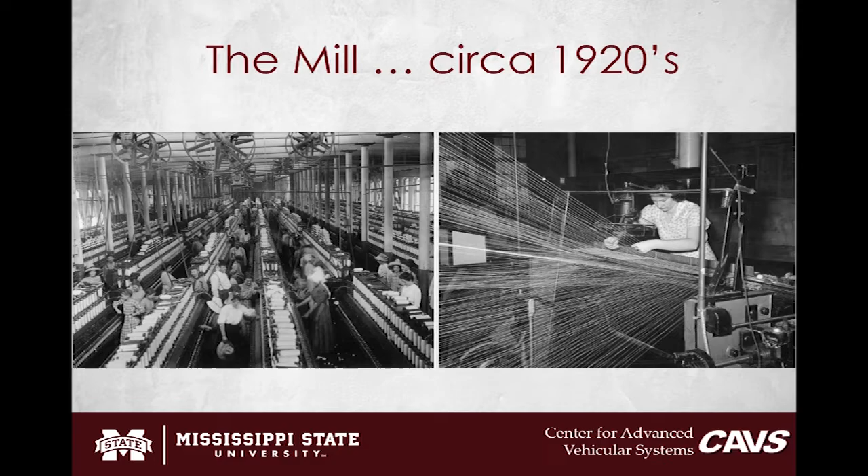About the same time, this building started in 1900, and this is pictures of 1920. About the same time in Japan, the founder of Toyoda dealt with automated looms and dealing with much of the same challenges that happen here in this building. So it's very fascinating—the first automatic loom by Mr. Toyoda is pictured here, and he developed it about 1924.

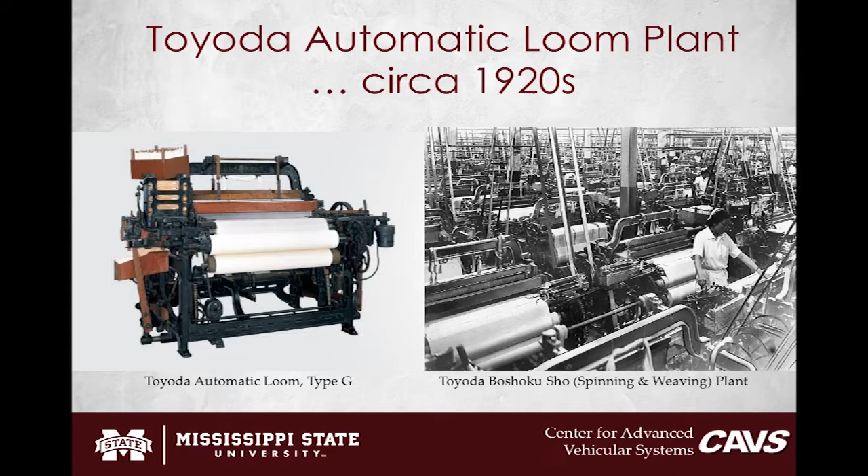It was the first illustration of automation with a human touch. In fact, in the Toyota production system, it's called Jidoka. Now, I will not embarrass myself for all of our Japanese people here, but it's very important—meaning ultimately this involves two different phrases. One is automatic, and the other is autonomous.

The achieving of Jidoka has to do with a topic called autonomation, which is the characteristic that the machine has—autonomation. It doesn't mean stopping automation. It means this combining of automatic and autonomy together.

One of the wonderful aspects that was revolutionary for this loom in 1924 was that it could self-regulate, and it could see where there's a problem in the looming operation, and it would stop immediately when there's a problem that has to be fixed.

And ultimately, what they're allowed to do is free up a person from operating a machine to a person managing machines. It relieves the worker of the need to continuously judge whether the operation is normal or whether an abnormality exists that we need to pay attention to.

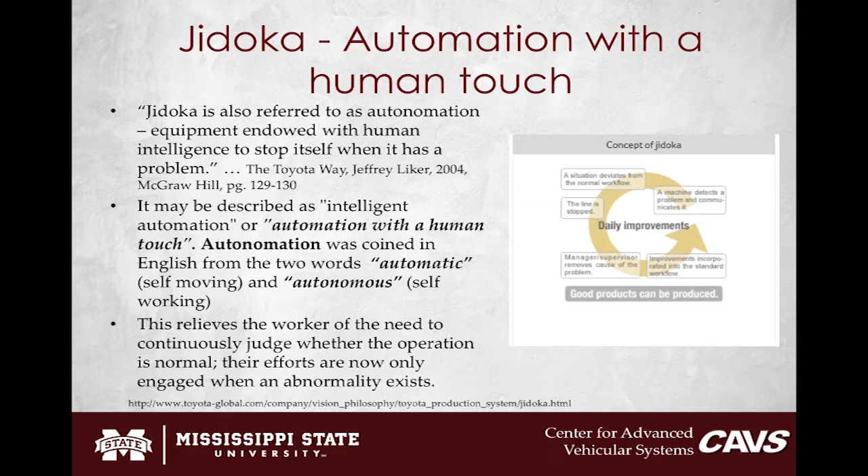And so this is the concept of Jidoka that has revolutionized a lot of manufacturing. And I think there's actually a connection here to autonomous driving.

When we think about autonomous driving, we've already talked about there's various levels of autonomy, from level 0 to level 5. Level 5 is full self-driving under all conditions. Just a step below that is self-driving under certain conditions. Step 3 is limited self-driving, but with some times where the operator takes control. And you kind of back it off to occasional self-driving, to driver assistance, to no automation.

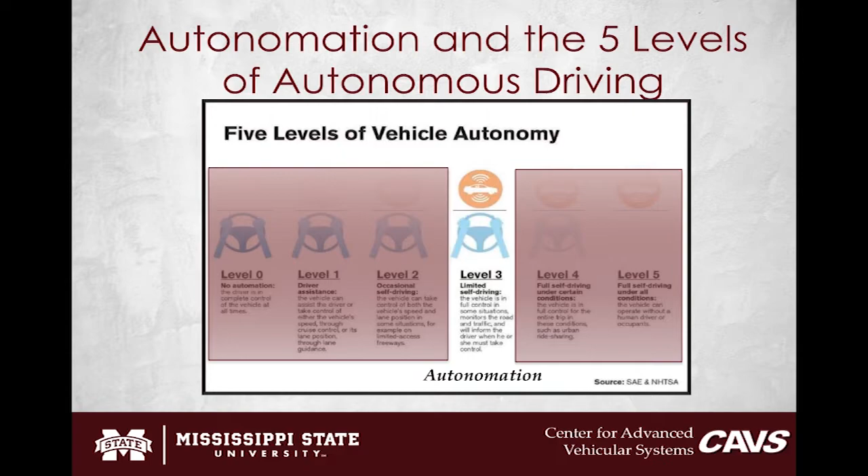So with these 5 levels of vehicle autonomy, it really looks like level 3 is where, if you think of the loom as being the machine, the vehicle being the machine, it feels like in 1924 Mr. Toyoda really discovered this principle of an intelligent machine and how it would impact the human. This is that notion of autonomation, maybe about level 2 or level 3 in this hierarchy of autonomous driving. So he was working this problem at the same time that this building was under production, and I'm sure they were dealing with many of the same challenges that he actually solved.

2017, last summer, my first and really only experience in autonomous driving was at this location in Strasbourg. The event was an international smart transportation conference in Europe, and it was the first day they advertised that someone would ride in an autonomous vehicle across national borders. I don't know if it really was the first, but that's what I was told. I wasn't on the first ride, but I was there on the first day. This is the car, developed with Vedicom, a French public-private partnership. I was very excited. I was in the back seat of that car, and we went from Strasbourg, France to Kehl, Germany and back again.

We did a legal U-turn after we crossed the Rhine River. That was my first experience. It was very interesting. In fact, I have a short little video - that's me in the back seat trying to take a picture of the autonomous car while we were merging into traffic. It was very thrilling, and there were some lessons learned from this event.

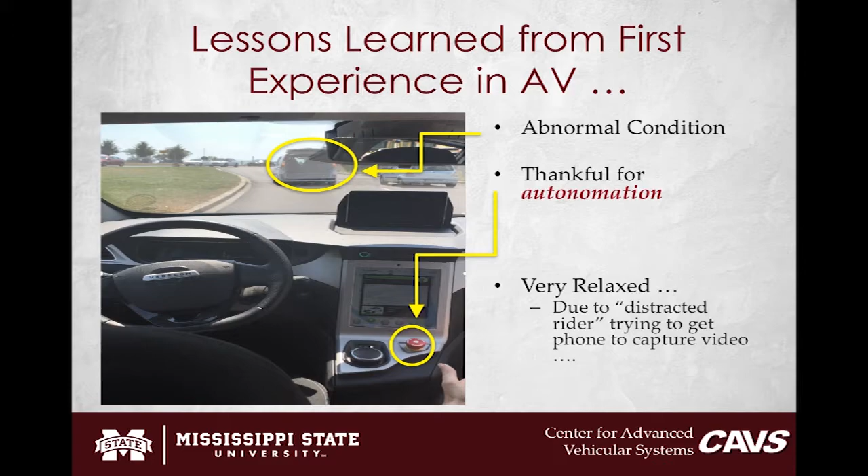It was a great experience, my first experience there. Just very quickly, from a standpoint of manufacturing, which is a much more controlled environment than driving - we have seen tremendous improvements in automation, collaborative robots, and human-machine interfaces in manufacturing. But I can say from 30 to 40 years of intense work in manufacturing, this level 5 automation is very, very difficult. Level 5 autonomy is very difficult to achieve, even in a highly controlled environment.

In fact, I believe McKinsey just did a report on manufacturing tasks, looking at how many of them could be automated over the next several years. I believe it was by around 2035, somewhere between 25 and 60% of manufacturing tasks could be automated - again, the error bar was very high. We don't know where technology is going. But it's a very challenging task, as mentioned earlier.

And the other thing for manufacturing - you get a lot of quick wins early, but it's the last 10 or 20% of automation that's really, really hard. Perhaps we'll see that in the vehicle space as well. And from a manufacturing standpoint, we should always look at the machine serving the person, not the person serving the machine. That actually gets to the heart of our conference - when the equipment serves humans' needs, then it has a lot of value for us.

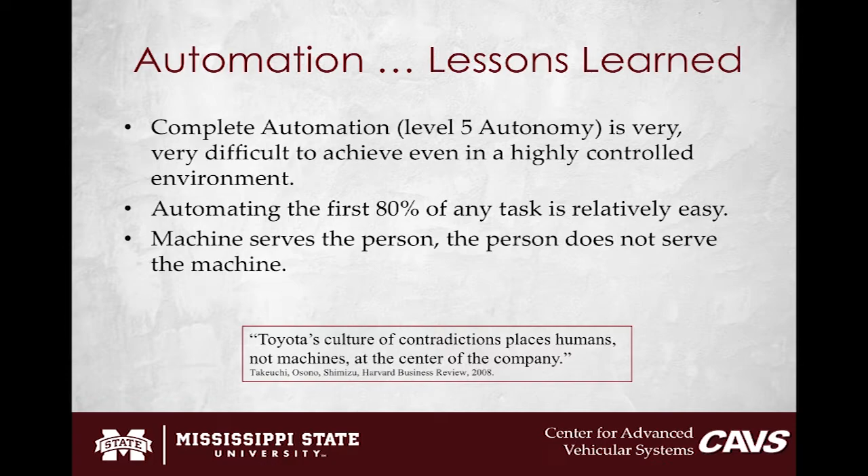In fact, there's a nice comment about Toyota: Toyota's culture places humans and not machines at the center of the company. So I believe that this notion of automation with a human touch is very important to us.

So I wanted to briefly talk about some of the activities and investments we have going on at the university and at CAVS, and I have our team here to help us do that.

We have a couple of selected projects. One is a pedestrian-vehicle interaction using virtual reality. We also have a Halo car project, which is an autonomous vehicle we're developing with our researchers and students to be a test vehicle for us. And then we have a test track we are in the middle of developing, and what we call the MAVS system, Mississippi State University's autonomous vehicle simulation world.

Then we just recently completed an industrial material handling autonomous project that we're very proud of, and the team executed it very well. But because of confidentiality, we can't talk about it much. It's an autonomous vehicle within an airport environment, in a material handling environment that had different kinds of loads, and it had particular interesting challenges.

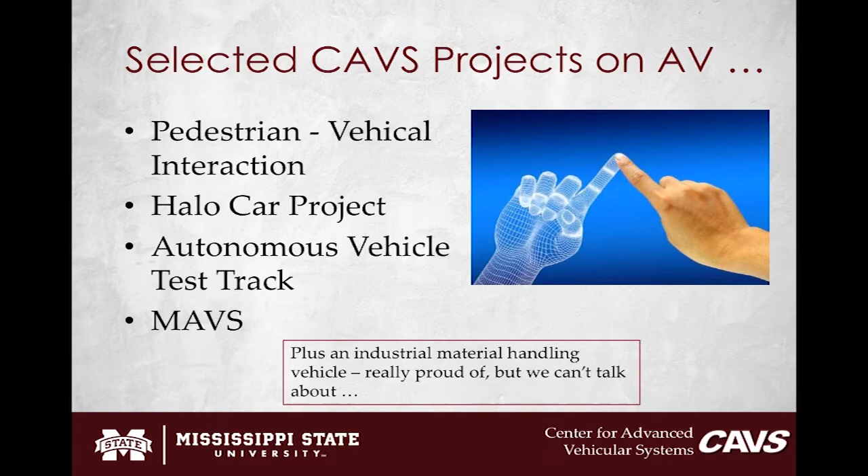So with that, I'm going to turn over the conversation to Dr. Carruth, and he will talk to us about the pedestrian-vehicle interaction project.

All right, thanks, Clay. So we have a slide here on some work we've been doing for the last couple of years, and in fact some of this was initiated as part of our relationship with Nihon University and has grown since then. On screen you can see an image of us using HTC Vive and Oculus Rift technology to put people inside of our simulation environments.

What we're looking at in this image is one of our students walking across, and we have the autonomous vehicle attempting to communicate to the pedestrian that it is safe to cross.

When we look at autonomous vehicles interacting with pedestrians, bicyclists, and other vulnerable road users, there's a discourse that happens between a human driver and those pedestrians. Part of it is that we just know what each other is most likely to do. We assume a driver doesn't want to run over us when we're a pedestrian, and drivers assume the pedestrian will generally follow the rules of the road. But we're always aware that there's a possibility someone's going to come out into traffic.

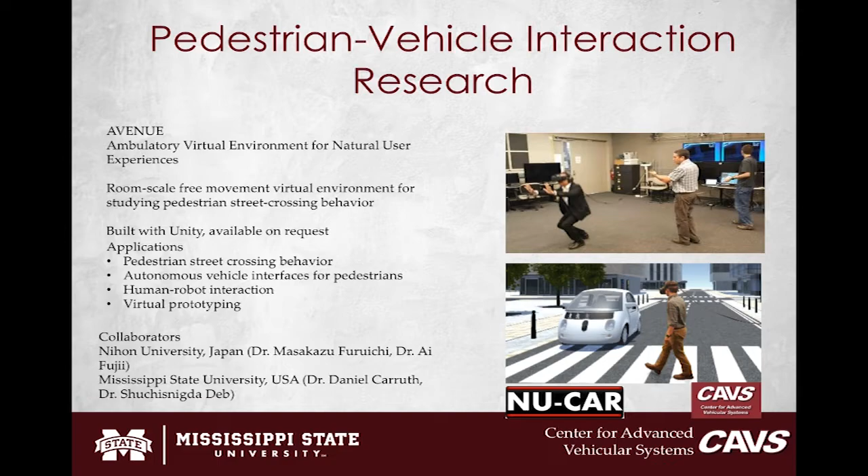We use the VR environment to do that kind of research because it's impractical to do in the real world for several reasons. One is safety—it's a lot safer to have someone walk across the street inside our simulation. Two, I can run a lot more conditions inside the simulation than in the real world. We can test literally hundreds of different methods of communication inside VR in the same time and cost it would take to test just 2 or 3 in the real world.

Also in terms of time, when we go out to do real world data collections of pedestrians crossing the street with vehicles, the logistics are astonishing. Trying to schedule and take over a road to look at that is very difficult. Inside our VR environment, we were able to collect 60 interactions between an individual and an autonomous vehicle in under an hour. By using simulation with a person in the loop, we get a lot more data on how people interact with those systems than we can in the real world.

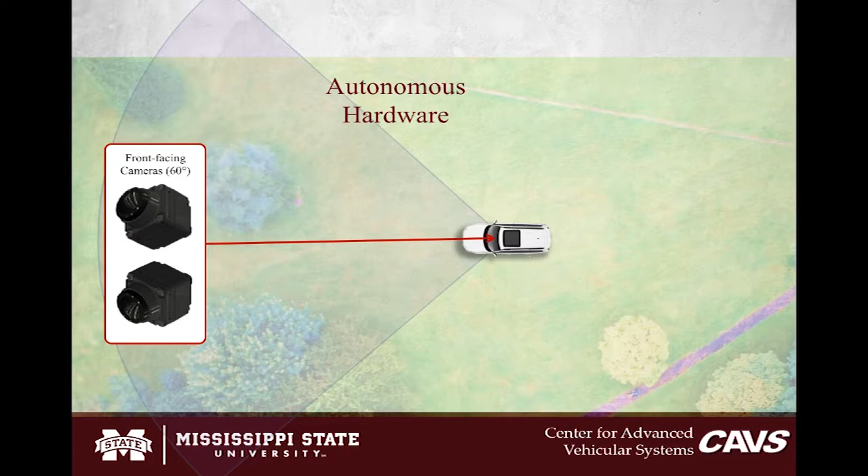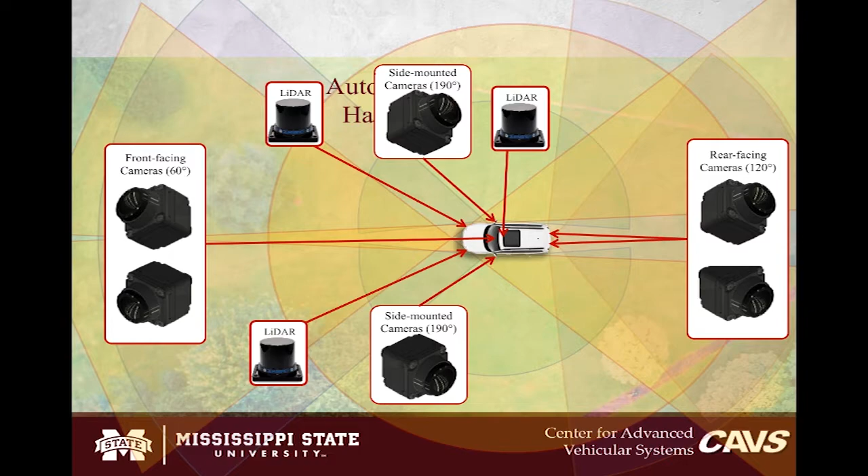Some of the sensors on the vehicle include 6 cameras—front, rear, and side—and 3 LiDARs, which together give us full environmental awareness of the vehicle. We'll add radar at some point, but that's not on the vehicle currently. We're doing some interesting things with how we mount sensors to, as we fuse the data, get a more focused and accurate view of the world in the areas of the vehicle we're most interested in, particularly right in front. This is where we're also using the NVIDIA Drive PX2 GPU supercomputer.

As we fuse all this data together, it becomes really interesting because Sanford showed an image of a free space map. It was on a mostly flat road, and there was a purple area in the middle—that's the free space that's safe to drive. That's a common algorithm. But what if the space in front of the vehicle is not flat, not planar at all? What if it's bumpy, hilly, or angled?

What if instead of doing neural net object classification for cars, pedestrians, and motorcycles, it's trees, logs, and deer? Now the deer one has actually been addressed somewhat in industry, but recognizing trees and logs and rocks in general has been less focused on than on-road object detection and classification. So that is where we feel we can really make an impact in the autonomous vehicle industry.

We're collecting data in off-road environments. We've already taken this vehicle platform out and collected some data. Clay is going to talk to you in a minute about a really neat facility that we're developing in order to help collect that data. And we take that data and we fuse it together, and we're working on really novel ways to process it.

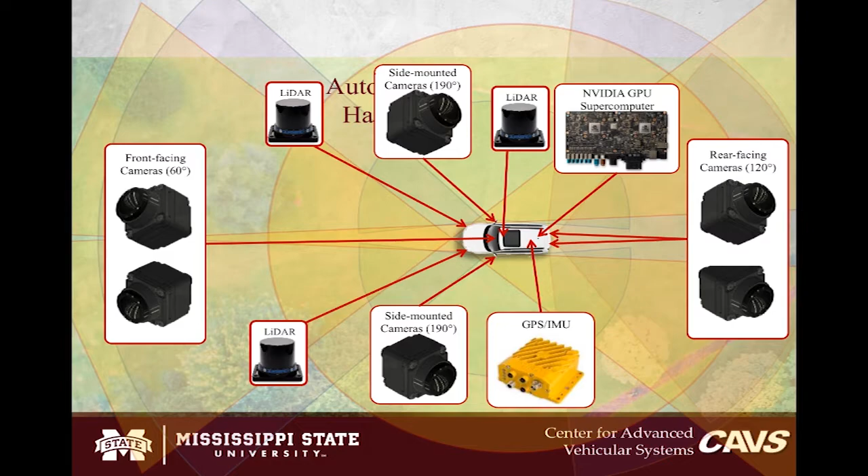We look at the world model, which we then use to control the vehicle's actions. For instance, we're working on what we call a characterized occupancy grid. So we'll take all the data from all the sensors, fuse it together, put together everything we know about the environment, and say if this room is our environment, create a 3-dimensional grid around the entire room.

And in each grid we say, inside this cell, what is inside the cell? Is it unoccupied? Is it occupied? If it's occupied, what do we know about what's in it? What are the characteristics of that cell? What's its tangency or adjacency to the cell next to it? Is it a step or is it a smooth curve? That represents something we can drive over. So we have to classify not just obstacles, but objects, and objects can be either traversable or non-traversable.

So these are all the many kind of unique challenges that you start to get into when you're in a completely unstructured environment, such as an off-road environment. So we're really excited about this.

Briefly, I mentioned the vehicle is all electric. We have a 90 kilowatt-hour battery pack, which is good for about 230 miles of range. Just to put this in perspective, the longest range Tesla vehicle has a 100 kilowatt-hour battery pack, so we're on par with that in terms of range.

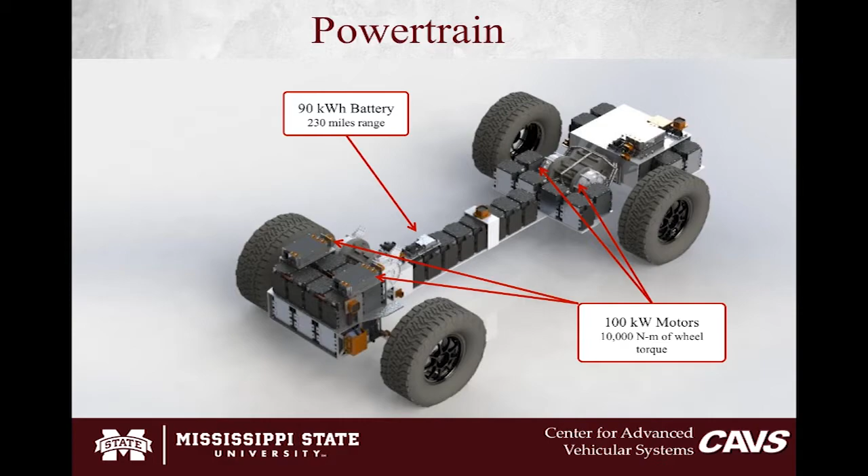The vehicle is driven entirely by electric motors. It has one for each wheel. Altogether, it makes about 10,000 Newton meters of wheel torque. To put that in perspective, each motor has about the same wheel torque as a Mustang GT, and we have one on each wheel. So the powertrain of the vehicle will be very high performance.

And MSU isn't doing this alone. We have 6 industry partners that have come on board and provided either cash, in-kind donations, and/or engineering support. So we've built almost a consortium of industry partners that are helping us achieve this, NVIDIA being one, and also 5 other partners. So this vehicle is back in our shop right now, in our lab, being put together with quite a large team of researchers working on it. So we're really excited about this project.

One of the things we want to talk about is that we have just acquired 50 acres close to our building. If you look at this aerial shot on the right-hand side, the CAVS building is on the far side, then our high-performance computing collaboratory is over there, and then we have 50 acres behind. We are converting this to an autonomous vehicle test track with a large focus around off-road. You'll see we're going to have different artifacts - sand, wooded trails, hilly terrain. We'll also have a concrete pad.

So this is the vision that we have. Right now we've acquired the 50 acres, so we have a 50-acre wood. The first phase will be looking at the off-road situation. We have some sponsored research with the Army and other people who are interested in that, but we want to go beyond that and look at other aspects. It could be - Professor Snyder and I talked about precision agriculture and autonomous vehicles in the agricultural environment - so there could be some nice collaboration opportunities. We look forward to discussing that.

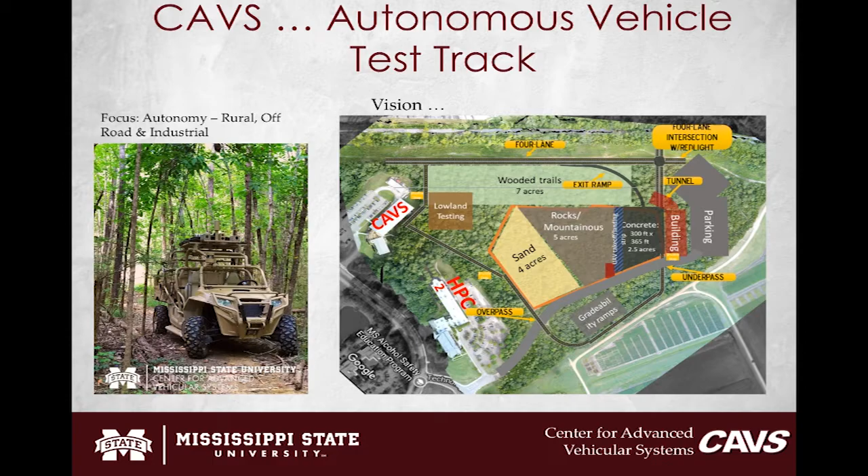So with that, I'm going to have Dr. Chris Goodin come talk about a new system that we are calling MAVS.

All right, thank you. Yes, I'm Chris Goodin, and so real briefly, I want to talk about MAVS.

Have until when? We're already over. I'll make it quick.

Like Dr. Walden said, it's the MSU Autonomous Vehicle Simulator. Basically the goal for the simulator is to provide a simulated test area that corresponds to the real test area, to the wooded test track that you see here.

Fortunately, we got a great motivation for why we want to use simulation in general in the last talk.

But what I want to talk about with MAVS is our focus on off-road. There's some unique problems in off-road, the biggest one being that one of the primary sensors you're going to use, obviously, is LiDAR. And there's some real problems with LiDAR interacting with vegetation.

Before I came to Mississippi State, I worked for the Army for 9 years. And I once heard an angry colonel say, 'I'm tired of seeing my 20,000-pound trucks get stopped by a blade of grass.' But that's what you see when you try to use LiDAR for autonomous navigation in vegetation, because the vegetation can appear opaque to that particular sensor.

So certainly a multi-sensor approach is necessary, but from our simulation environment, we knew that we had to get the physics of that sensor-vegetation interaction correct, and it extends even beyond vegetation to things like the soil. We can't assume that every surface is drivable when you're in an off-road environment. Just because it's flat doesn't necessarily mean you want to drive on it.

And if you've driven around here off-road very much, or further south where I'm from in Vicksburg on the clay, you may have found that out the hard way.

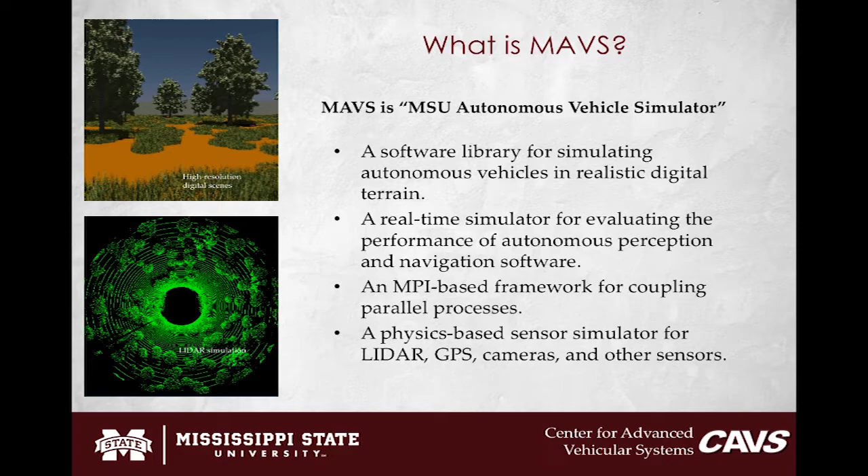Getting into a little bit of the details, I won't talk about this too much, but the simulation environment is built around MPI, so that we can scale it up to multiple vehicles, really complex environments, and really complex simulations of the vehicle dynamics itself on the supercomputer.

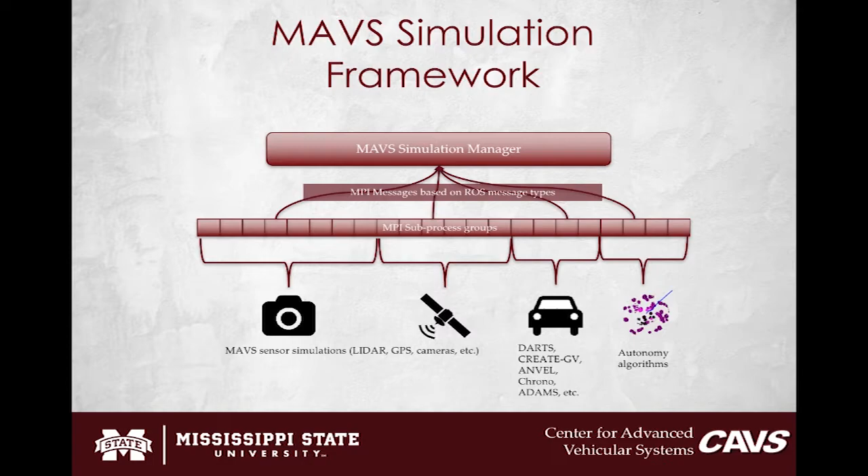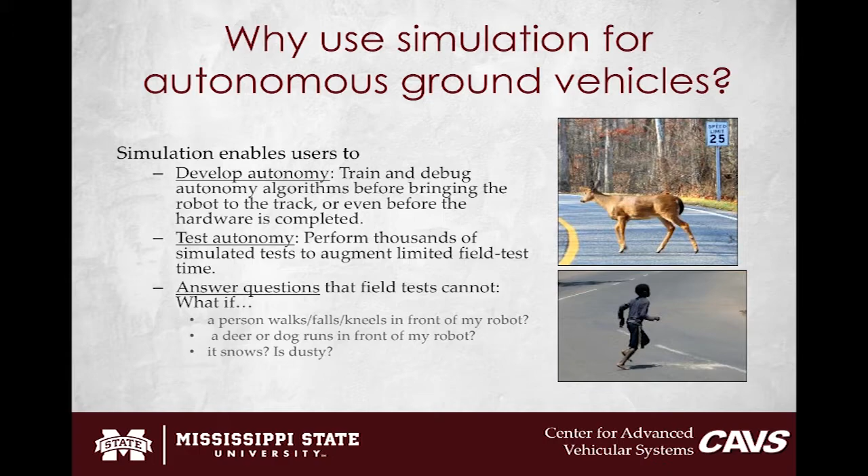Again, we got a great background on why we want to use simulation for autonomy in the earlier talk. It's funny, we brought up the deer - that's another one that if you drive much around here, you understand. That's not just a joke. If you drive here in Mississippi very long, you're going to hit a deer. It just happens. So it's one of those things our simulator also has to do.

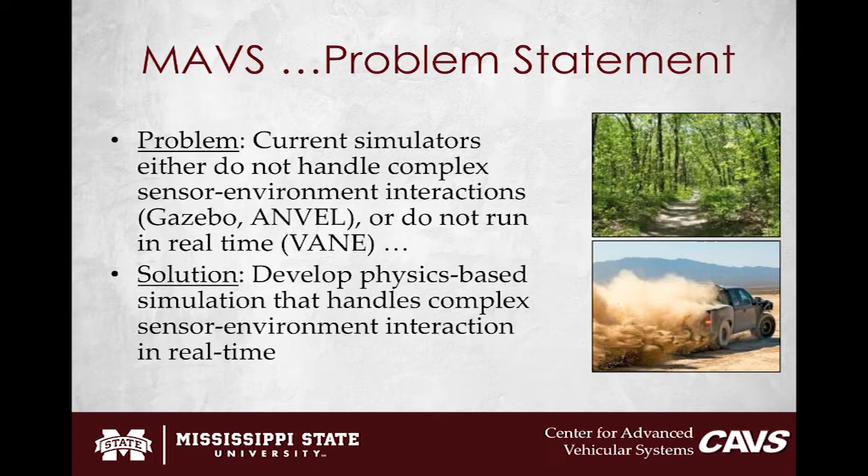So there's unique challenges associated with off-road, another one being dust. The MAVS is being programmed with the physics necessary to address the sensor interactions with those environmental factors in that perception phase, so that the other phases of the simulation will basically be correct.

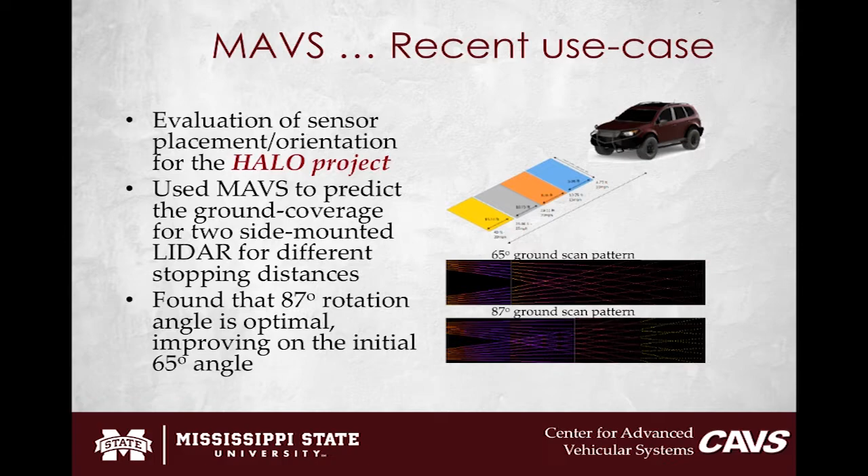And the neat thing, of course, about using simulation is we basically did this from the comfort of our offices in an afternoon, whereas the similar study would have been a lot more complex.

So the current status of MAVS - we really just started development of this in December. So this is very early on, but as I mentioned in this previous study, we're already being able to achieve some of the goals of assisting autonomy developers in creating a better product without having to go do a bunch of field tests, and steadily incorporating the environmental physics for vegetation, dust, and off-road driving.